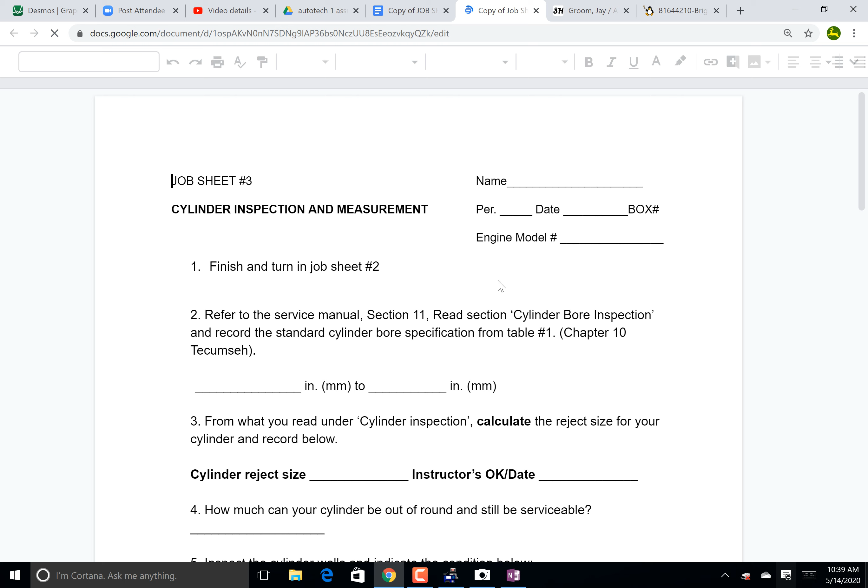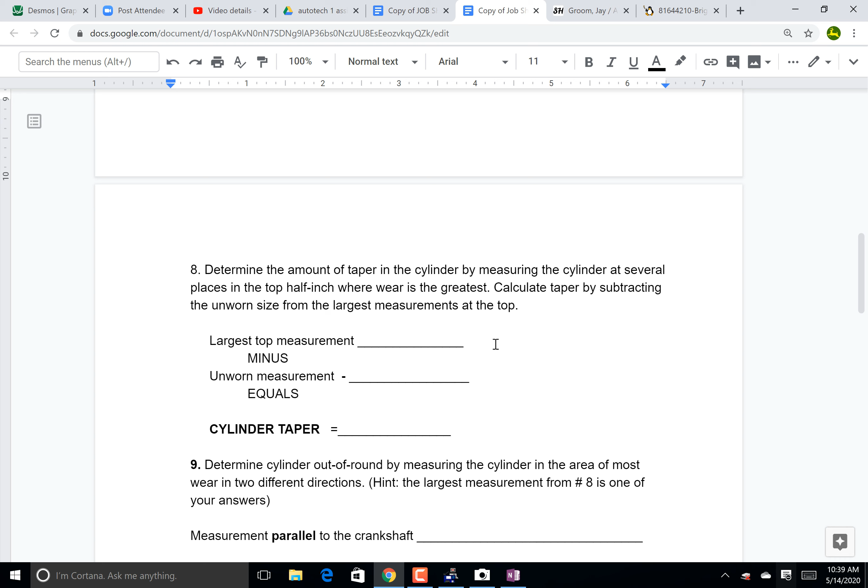Jeez. So we're gonna be looking at the cylinder. We're gonna see, what should it be measured at? How worn is it? That sort of thing. We're gonna talk about the top measurement and the largest one, and the unworn measurement. We're gonna talk about cylinder taper. Okay. And then we're gonna measure a bunch of other things here as we go along.

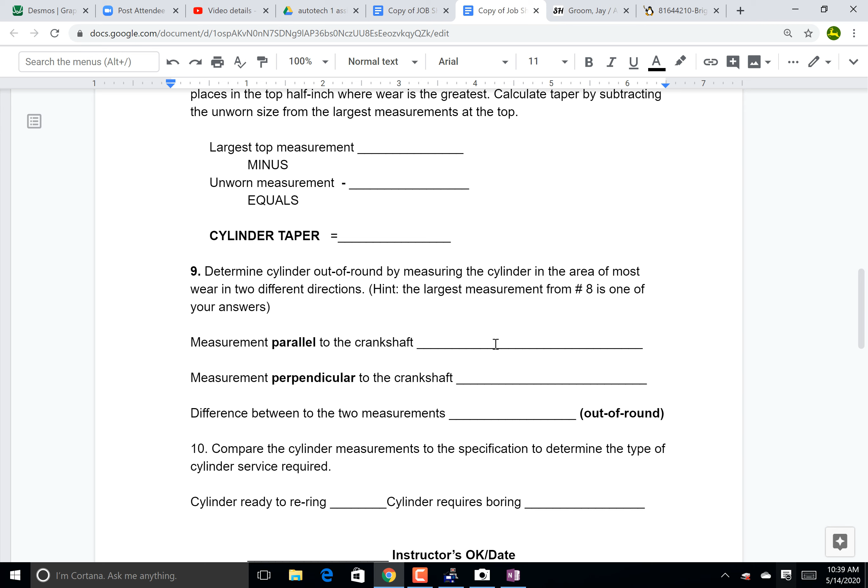Okay. Now, the general gist of it is this. As we come down through the line, we're going to look at the cylinder. We're going to look at the walls of it, see what it looks like. Is it still in good shape? How bad is it? Does it need to be honed out, or does it need to be bored out, or can I just put rings in it?

Newsflash, we're not doing anything. We're just putting rings in it. We're not even putting rings in it. We're putting the same rings back in. Again, we don't have enough money to completely rebuild an engine all the time, so we're not going to do that. But the things we are going to look at are as follows.

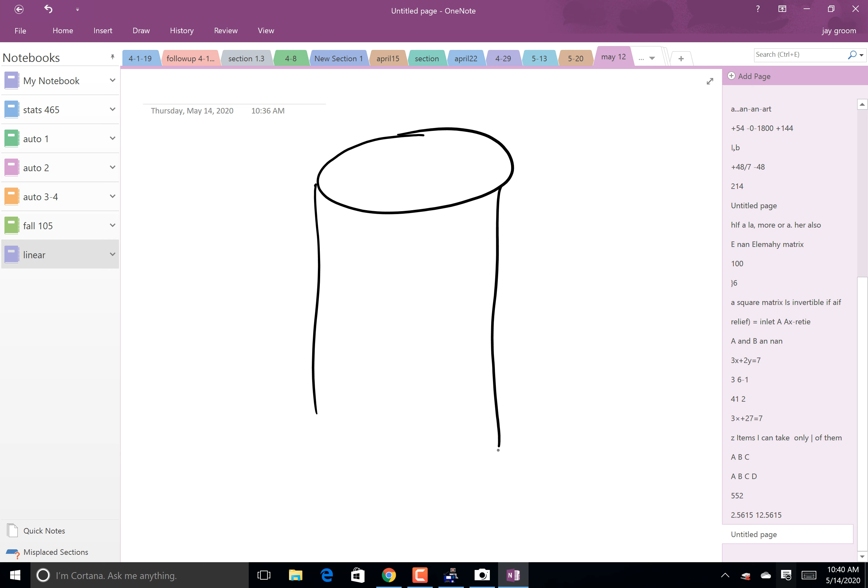So first thing we're going to do is inspect the cylinder, and I'll show you what that looks like in a few minutes. But we're going to be looking for, in a perfect new cylinder, what's called cross-hatching. So when they bore this engine out, they move the boring tool up and down fast enough that the little scratches it makes are not right next to each other.

Kind of microscopic scratches. They're small. You can see them, obviously. You can't really feel them. And then they go the other way. And the idea is that it's creating these little wall spots that will allow oil to get in and basically be embedded in the wall, and that will help to improve the sealing with the rings and the piston walls. That's what's called cross-hatching.

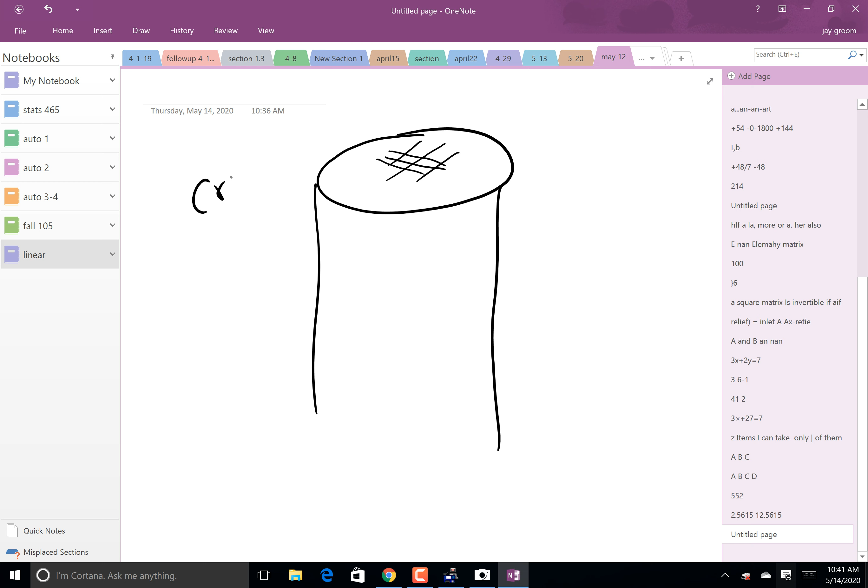Cross-hatching. Now, this cylinder we're going to look at in a second is pretty worn, to the point where you can't really see any cross-hatching anymore. You're also going to look for wear lines that are vertical; there will always be some after it's been run for a while. Those are not cross-hatchings. The vertical lines are not cross-hatchings. That's less than optimal, friends.

Think about this. If you put some oil here, it would run straight down, and oil could get past the rings and get up and get burned. Now, that said, in pretty much every engine that's been running for any length of time, there's always going to be a little up and down striations. What we're going to do is run our fingernails across them, crunch, crunch, crunch. If your fingernail catches on those, that is a problem.

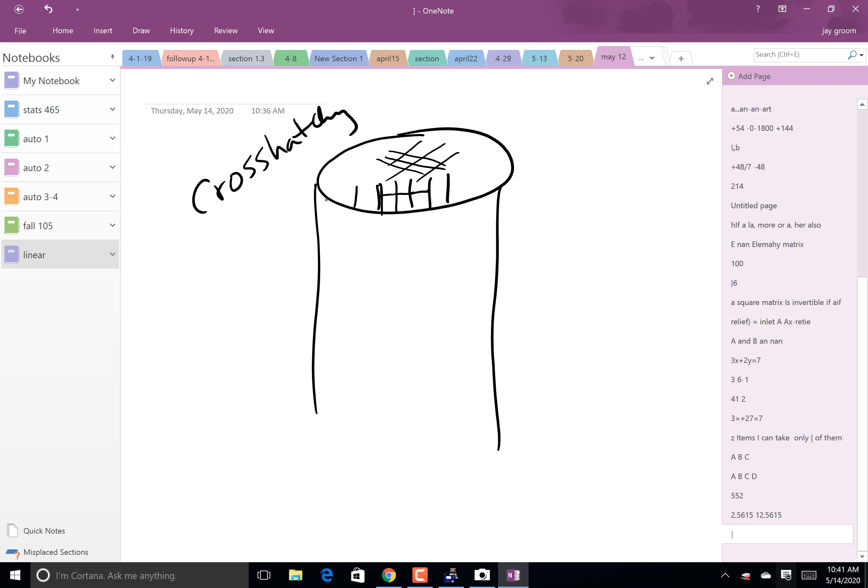If you can see them with your eyes, but your fingernail can't tell there's a scratch there, it's not a problem. If there was, we'd call that scoring, or scratching. So scoring is the idea that there's a little bit of these lines, but it's not that bad. Scratching is when you can actually feel them. Light scoring, some people will say, maybe you can just kind of feel it. But the point is, if you can feel it with your fingernail, it's a problem. If you can't, it's not really that big a deal. So don't want to see that ugly sucker.

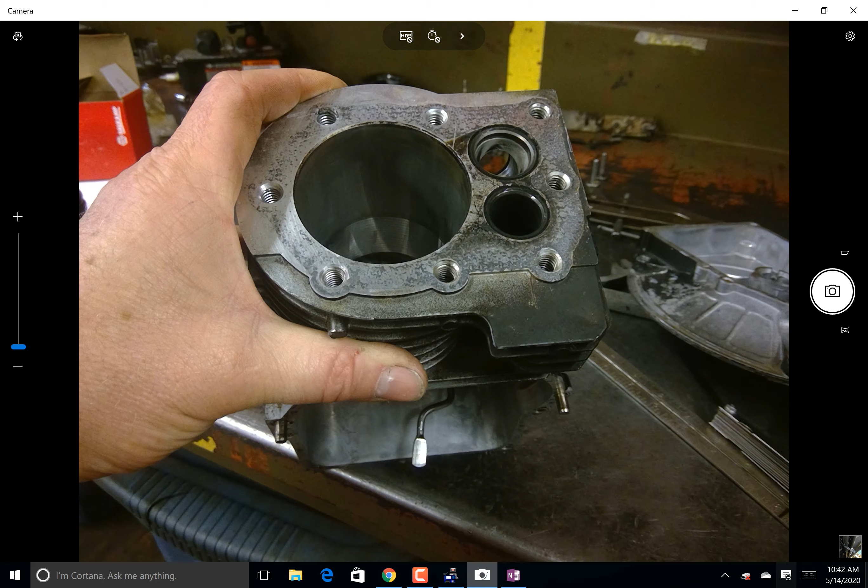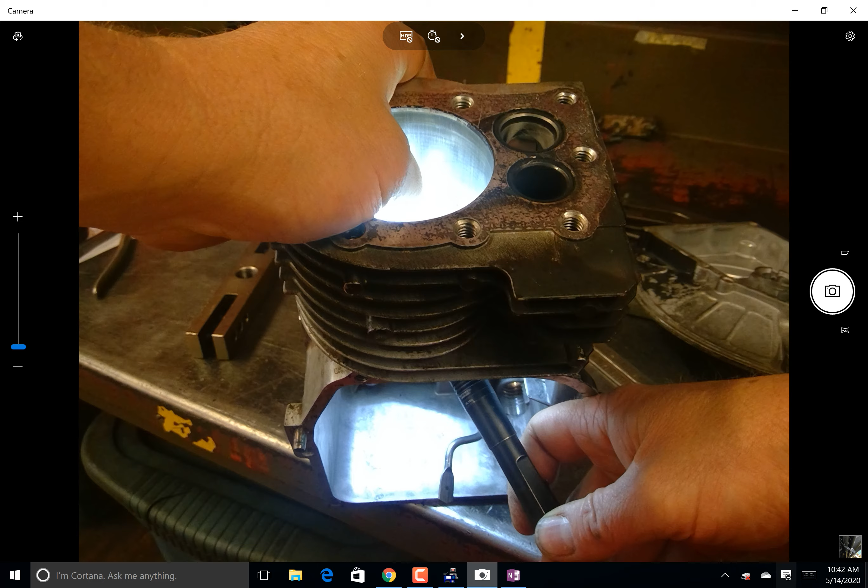In here, if you look into there, let me get some light on the subject for you. So if you look, maybe you can see some vertical lines, yes? Those vertical lines are the wear patterns in there. Maybe from underneath. Is that better? Yes. But what you'll notice is I take my fingernail and run across it, and I can't feel them at all. I can see them, but I can't feel them. So this is not bad.

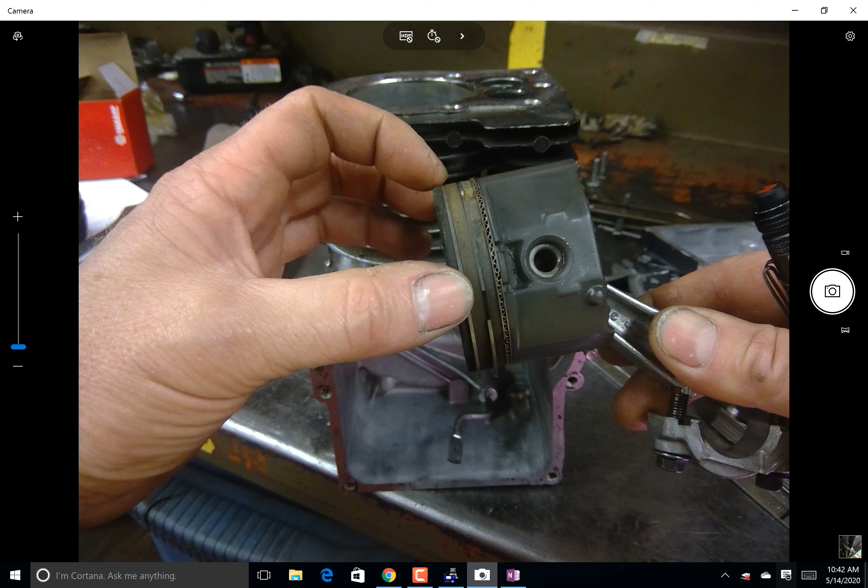Also, toward the very top, you'll notice the top ring on the piston does not go to the top. So oftentimes what's called a carbon ring will form right around the top edge of the cylinder here, and over time you will wear down below that top of the piston, because the rings will be rubbing on the cylinder for years and years, but not at the top of it.

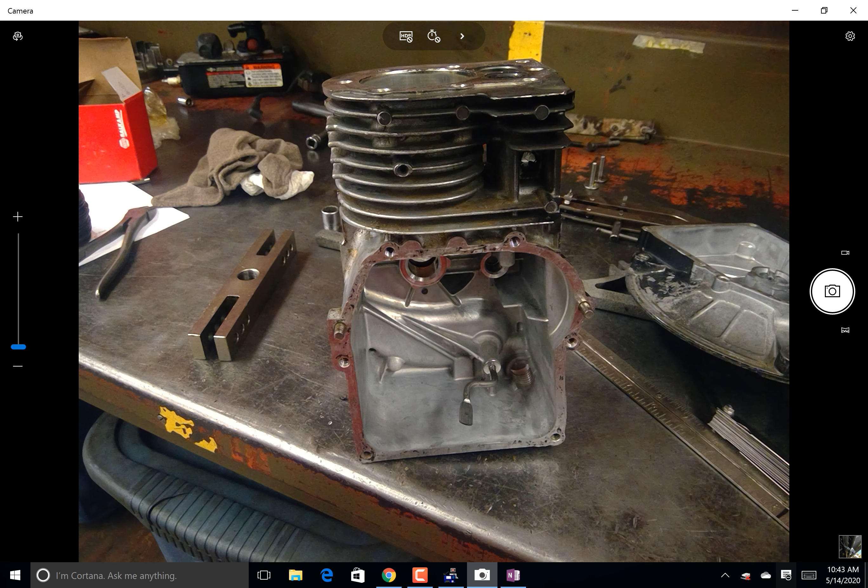So sometimes what you'll see, for a really worn engine, there'll actually be a ridge at the top, which is where the cylinder should have been, but it's been worn below that to the point where it's very damaged, obviously, at this point. And this one is not like that. This one is smooth as a baby's buttocks, and not dirty either, really.

Nice. I don't feel anything with my fingernail. It's nice and smooth. I also don't see, however, really any cross-hatchings in there anymore. I'll try to take a picture of another engine later today and clip that into this piece right in here somewhere so you can see what cross-hatchings look like. Well, maybe I'll just cut a piece from the interwebs and put that in there.

Now, what we're going to be doing today is measuring this. As you know, the diameter is the bore. In the perfect world, this is perfectly circular, and so whether you measure this way, this way, or this way, it doesn't make any difference. However, over time, remember the crankshaft runs this way, so this is perpendicular to the crankshaft. When this piston is coming up and the connecting rod is bent over like this, when it's being forced this direction, it's going to be kind of digging into the cylinder wall.

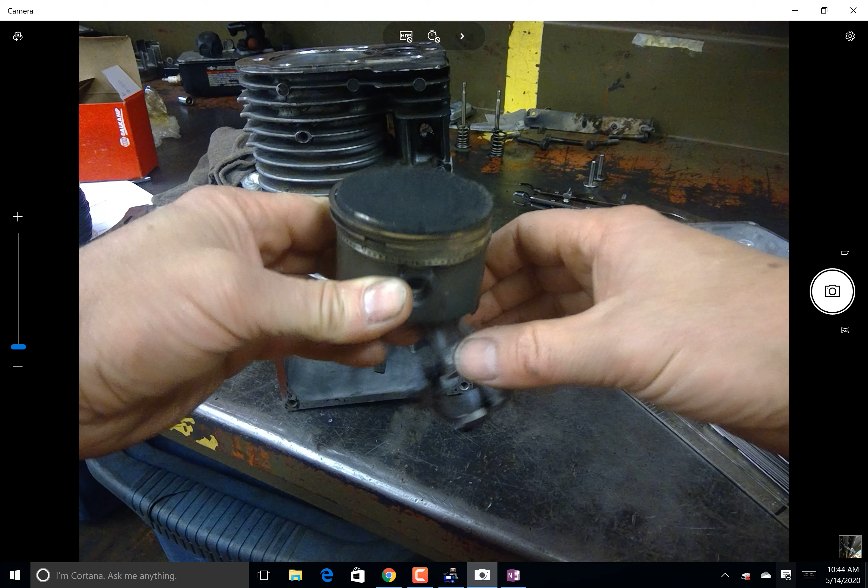That's grossly exaggerated, of course. And then as it comes up toward the top, it's going straight up and down. So on the top, you're going to get full wear all the way 360 for the most part. At the bottom, you're going to be getting a lot of digging this way. And what ends up happening is your cylinder becomes out of round, or if you will, a little egg-shaped. Not like this, just a little bit. And so measuring this way is going to be a little bit bigger than measuring this way. Perpendicular will be a little bit bigger than measuring parallel. But you will see that at the bottom and in the middle more so than at the top.

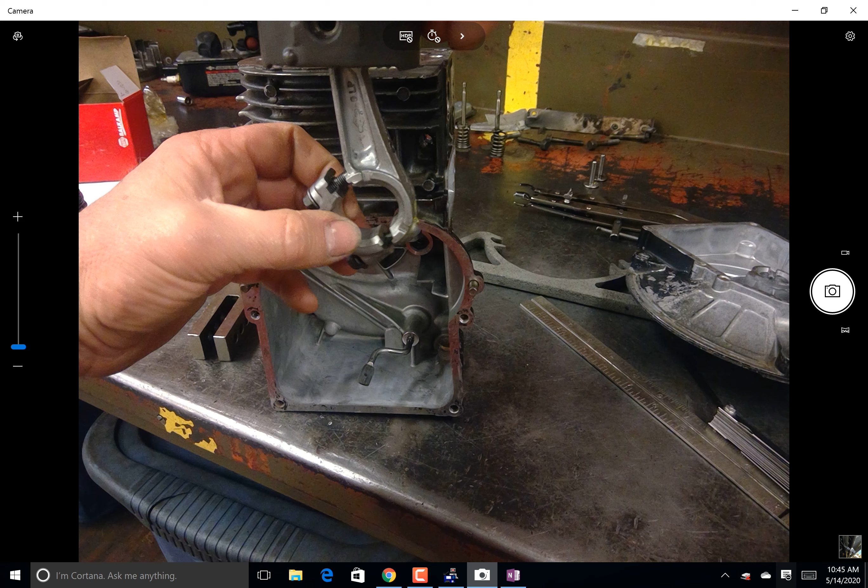At the top, again, when the piston's toward the top of the stroke, and obviously it goes down further than that, the idea is when it's up that high, the connecting rod is basically straight up and down. But toward the bottom, when it's really kicked over, you're digging in, and it'll create an out of round scenario for you.

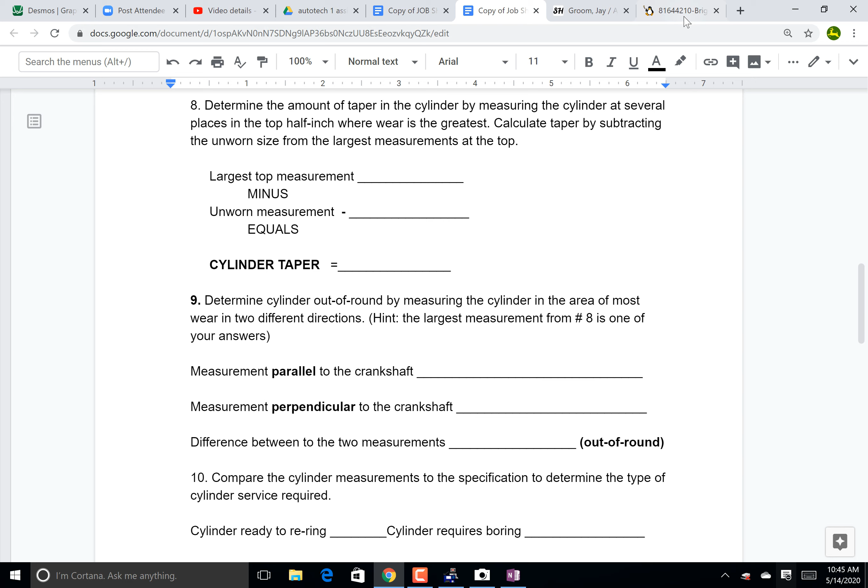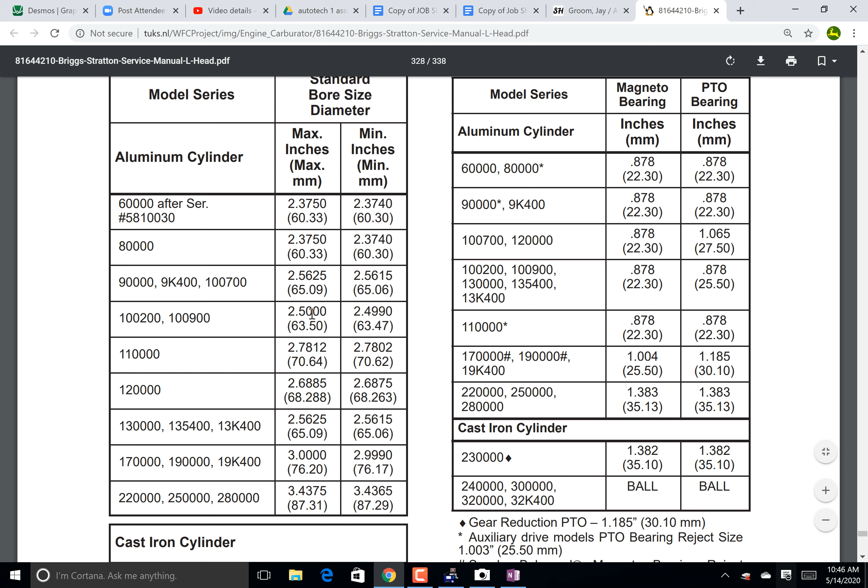Now, what we're going to do is a couple things. We're going to figure out what this engine is supposed to be. If you recall, this is a 10T engine. This manual does not actually cover the 10, well, it kind of does and it kind of doesn't. So it turns out that it's going to be this 10 series engine here. And I know this based on when I went and measured the diameter. If it was these ones, it'd be 2.5 inches in bore, roughly. Notice that that's plus or minus a thousandth of an inch. So that's the max it could be from the factory, and the minimum is this one right here. So it'll be within 1/1000th of an inch.

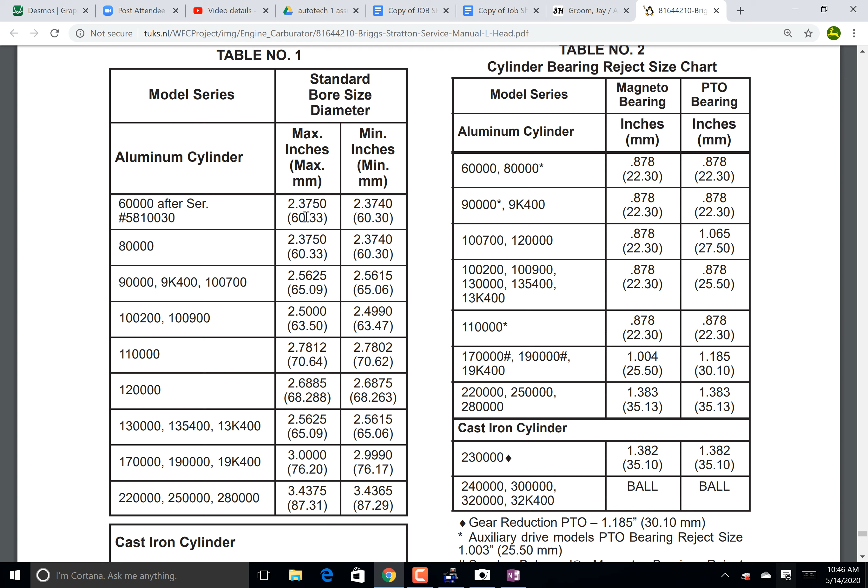Now, I went and measured it. Turns out we're measuring right in at 2.561-ish. So as you can see, that's obviously this one right here. It's the only one, I guess, besides this 13 series, which it's not. So it's that one right there that we're going to use for this. Now, what am I looking for? Well, it will tell me up here.

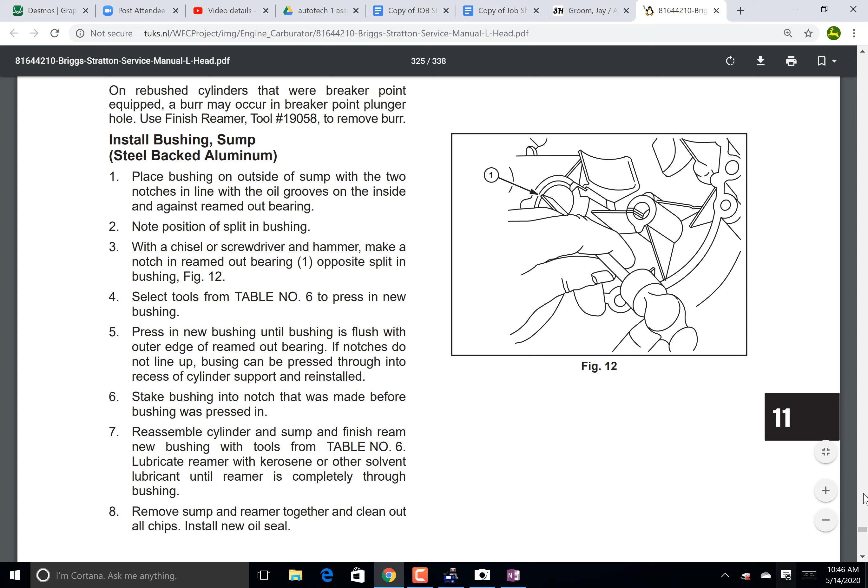Come on, Shimona. Well, there you go, friends. Look at that. Oh, fart.

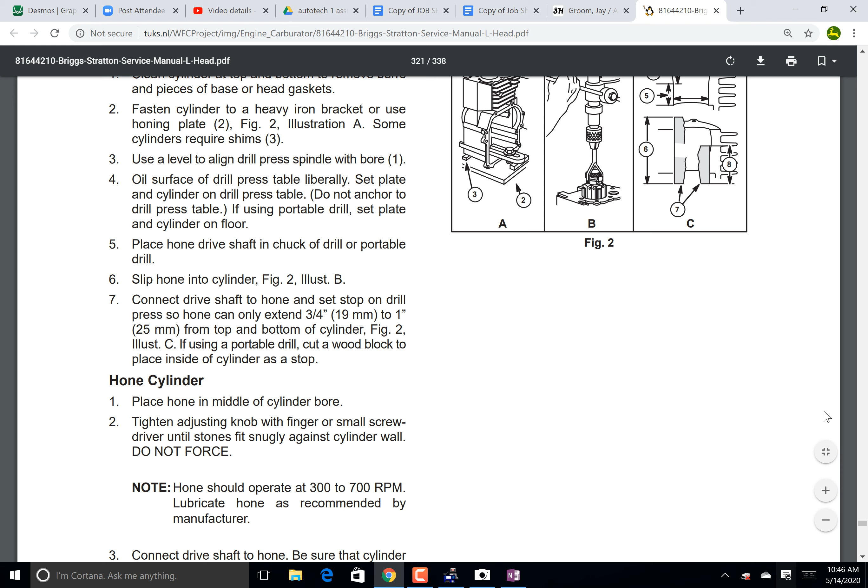That's what cross-hatching is kind of supposed to look like. You see that? But up here, a little bit more. Come on, Betsy. There we go.

So again, we're going to use the telescoping hole gauges, and we're going to measure at the top of the cylinder, perpendicular to the crank and parallel to the crank. We're going to do it in the middle, and we're going to do it at the bottom of the cylinder. This one should have the most wear, the second most wear, and the least amount of wear at the top. When we're done, check if the bore is more than 3/1000ths oversized. In other words, if you've been running this engine for a long time and it's worn and it's more than 3/1000ths over the initial bore, it's too big, and that would be a problem. The rings wouldn't seal anymore.

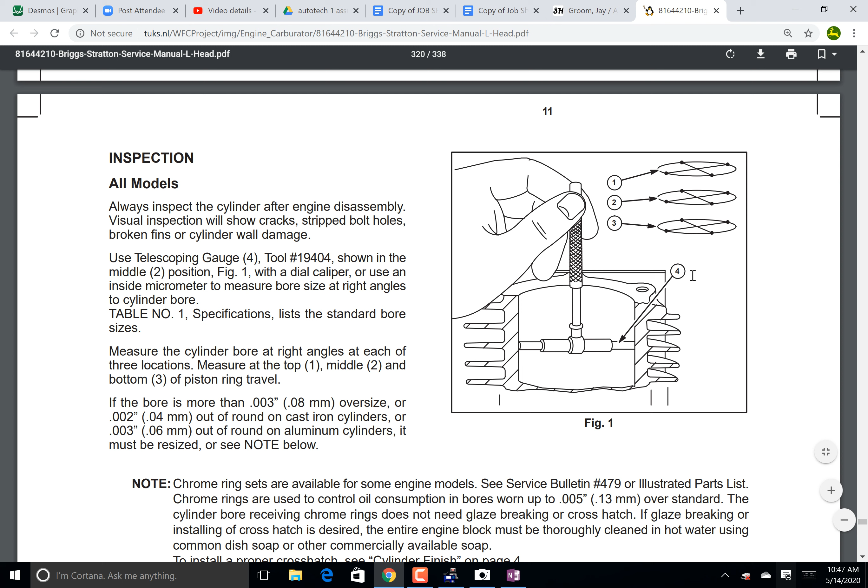Or it says if you're more than 3/1000ths out of round, that is when you measure, and again, it'll be this bottom one. And when you measure perpendicular to the crank, if it's more than 3/1000ths that way bigger than when you measure parallel, that's an out of round condition. It's egg-shaped, and that's no bueno, senor. No bueno. So I'm going to show you the first measurement here. Then I will probably just stop and do them off camera.

It's kind of a giant pain in the tushikins to do this while reaching over. I think I'm going to come around the table this time and do it, if you don't mind. Last time I tried to do it over the top and I kept messing it up, and I finally just started the video over. Screw that. Okay? Now, recall it is imperative that we are perpendicular. Tighten that baby down. Okay, so this measurement here is perpendicular to the crankshaft.

Sometimes I swear it'd be nice if I had 3 arms. I could find a use for 3 arms most days, I think. What would be nice is to have a clone of myself. Maybe 2 clones. One of me will go fishing, one of me will work. But see, the problem is if I had 2 clones, I would end up being the one that did all the work. Even my clones would be the ones that were out screwing around. That would piss me off.

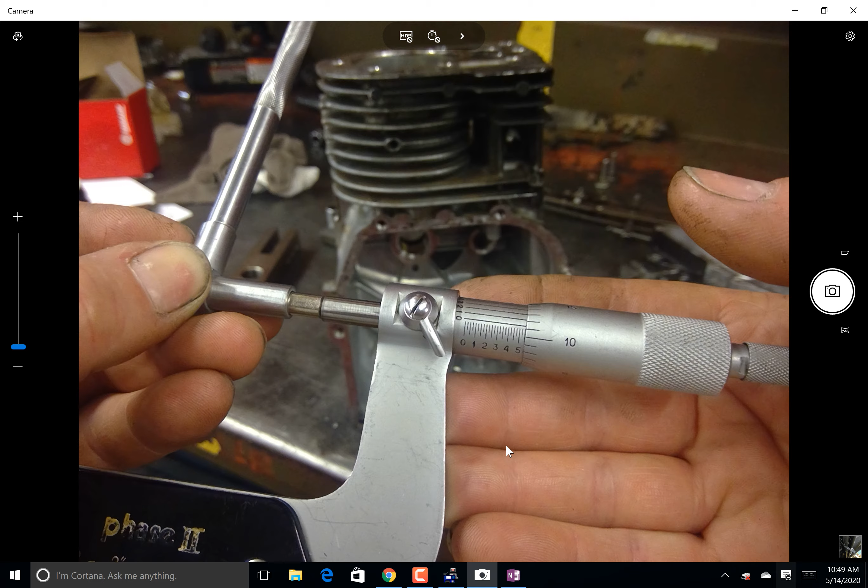All right, so here we go. So 2.56, 2-ish. I'll try to hold this so you can see it. Oh, fart. I think I mushed it down there. Anyway, you can see it's 2.5, and then there's 11. So that's 2.55 plus 11. It's 2.561 and a little bit. Are you with me? Okay, so that's pretty good. That's my initial measurement at the top.

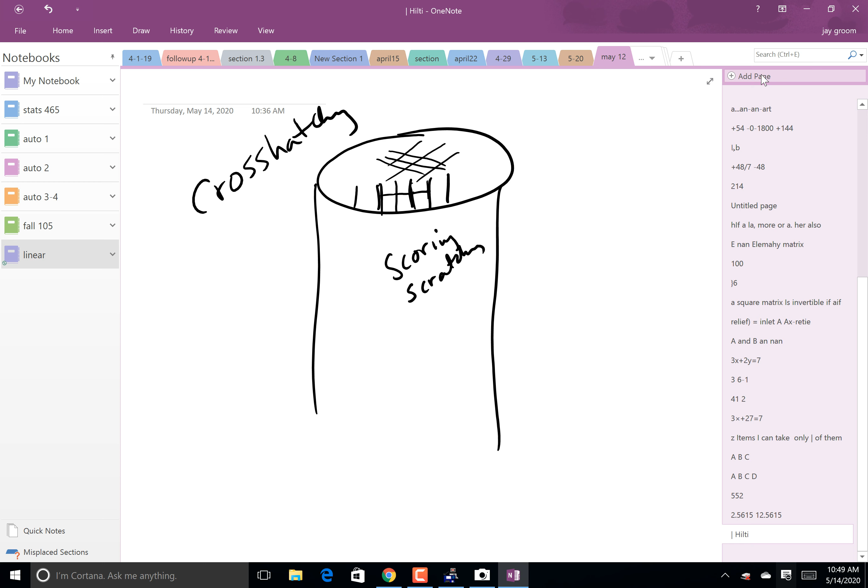I'll record the rest of them off camera, and then I'll talk to you about what they are, okay? I don't want to spend your whole day watching Mr. Groom trying to read a micrometer. It's kind of boring. So, top. And that was perpendicular. 2.561. Now, technically, probably you could go down to the 4th decimal, but I'm not going to be that excited about it, okay?

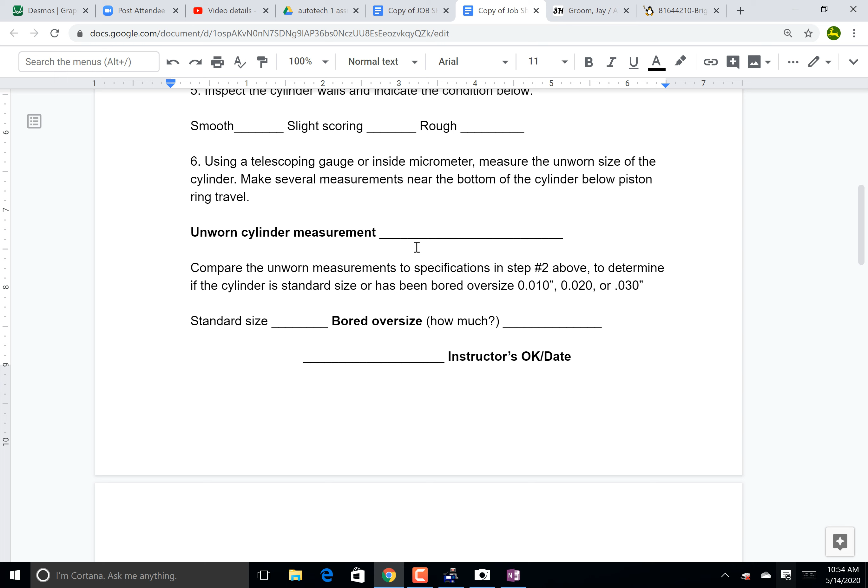Okay, so there are numbers, friends. As you can see, they're almost identical all the way down. So what does that mean to me? It means this engine's in really good shape. Am I shocked by that? Not really, on account of what I already said when we looked in there. The cylinder looked great. So we're going to start working our way through the sheet here. This is what the questions will be about. So, to the top here. Refer to the service manual, blah, blah, blah.

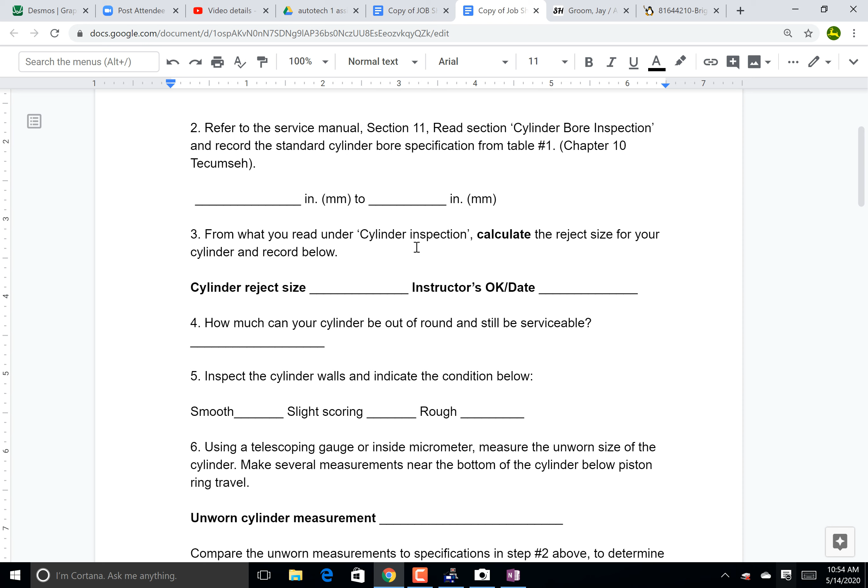Record the standard cylinder bore from table 1. That's 2.5615 to 2.5625. Those are mins and maxes, okay? That's from the chart. Now you look, you're like, Mr. Groom, this one is a skosh smaller than that. I actually went back and remeasured it. It came out basically right at it, okay? If you were a couple of 10,000ths off, not a huge deal. That's the answer to question number 2.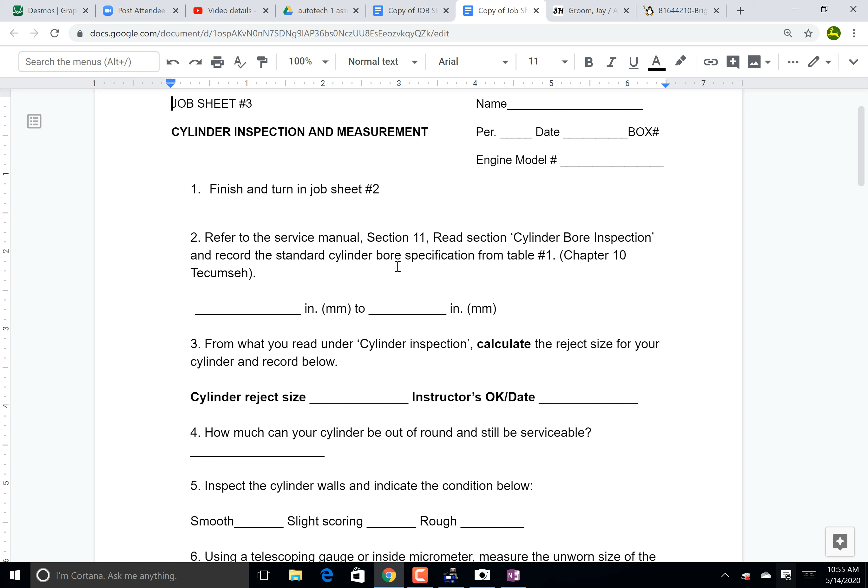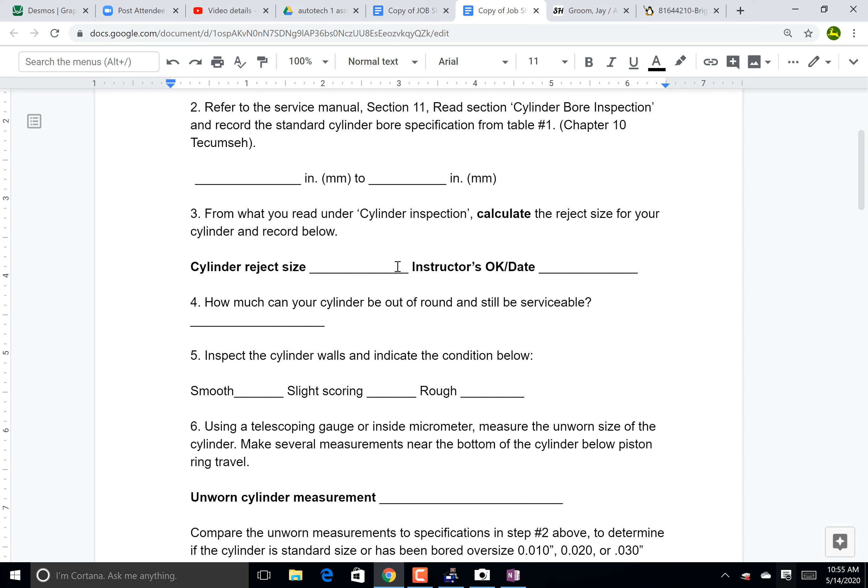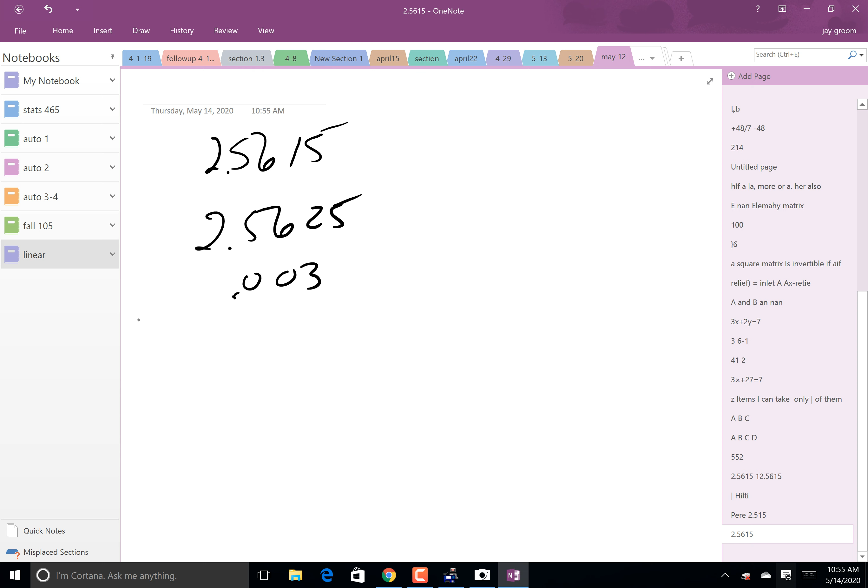From what you read under cylinder, calculate the reject size. In other words, when would it be too big? Well, remember, from the factory, it could have come a maximum of this big. If we were 3/1000ths bigger than that, where would that put us at? 2.5655. Anything bigger than that, no bueno. Bigger than this is our reject size.

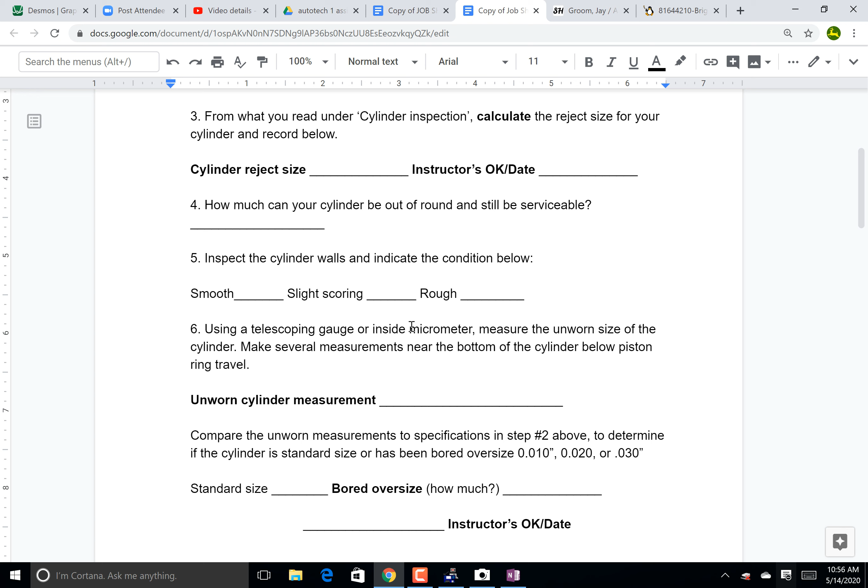Okay, where are we at? How much can you still be out of round and serviceable? Anything less than or equal to 3/1000ths of an inch. Okay. We are smooth as a baby's buttocks. Measure the unworn size of the cylinder. That's toward the bottom, below where the piston travels.

Now, for that, let's see this, friends. I will actually get you back on camera. Can't remember if this is the second time I filmed this or the first time. But right toward the bottom, you see it's nice and shiny right there. The piston doesn't come down that far. The rings don't come that far anyway. So I'm going to measure all the way at the bottom. In theory, whatever they bored it with at the factory, it should have been perfectly circular. Oh, fart. Try it again. And so the unworn portion at the bottom will tell us what it came from the factory with.

Oh, you hippie, you're not staying. Well, I hate you too. Piece of crap. I don't really hate it, Mr. Groom. Mr. Groom, you shouldn't say things like that, I feel like. I was reading like on face pages. Oh, nice job, dummy. I was talking to myself. I'll interrupt myself with myself. My story from earlier. I would like to clone myself. I think that'd be fun. Not because I really like myself that much, but I usually get a lot of work done. So it would be nice to have someone who worked as hard as I do to get some work done with me.

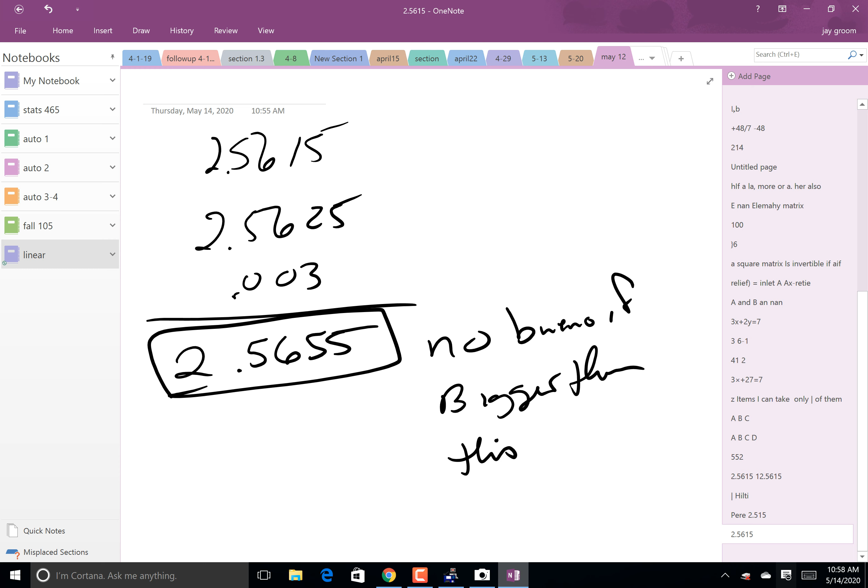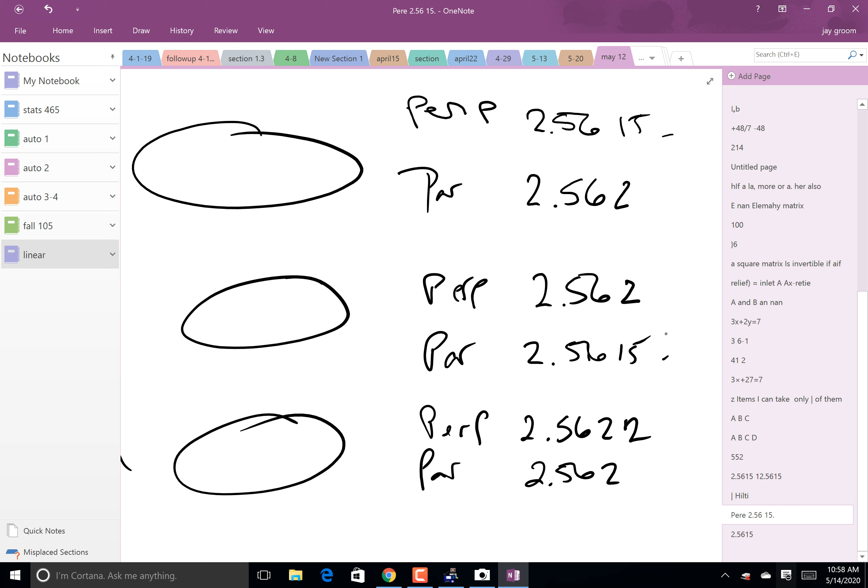2.561. 2.5617 it looks like. So our unworn, 2.5617 is what it looks like. Now you come over here, Mr. Groom. How is this one smaller? And how is this one smaller? It's off by 2/10,000, and Mr. Groom probably made a little boo-boo reading it. Okay, so not a huge deal. So that's our unworn measurement. Cool.

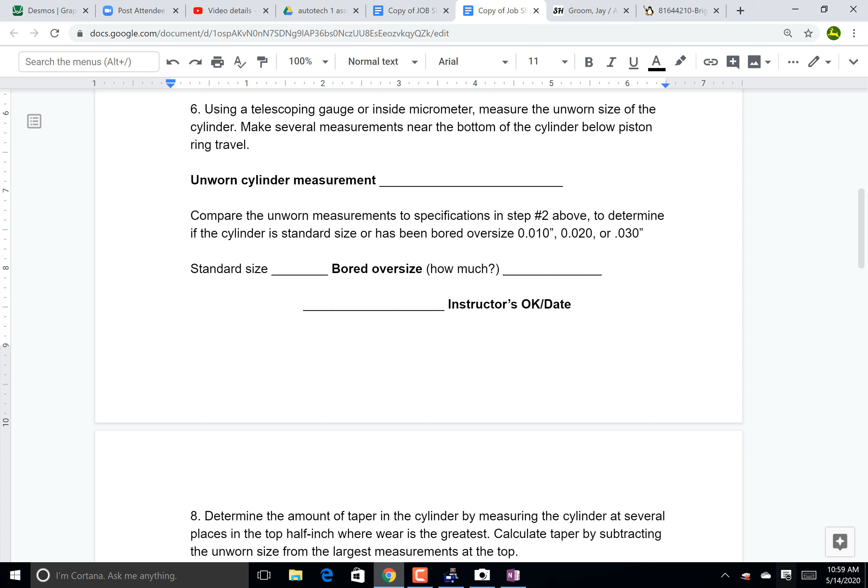Is it a standard size or is it overbore? Well, how would I know, Mr. Groom? Well, standard size is between 2.5615 and 2.5625. Are we between there? Yep. Then we are a standard size. Also, it's a good bet on an engine that was made whenever this one was made, well into the 21st century, if you will. People don't really bore these things anymore. If this thing had been made in the 60s, it's a good bet that it could have been bored at some point. Someone might have done some work to it. But as new as this engine is, no one has worked on these things like that for a long time.

Now here we go. What we are going to do is find what is called the amount of cylinder taper by measuring the cylinder at several places in the top ½ inch where the wear is greatest. So in the top cylinder. Okay, so we're going to subtract those. When we do this, we're finding a cylinder taper. I don't really like the way that's worded, but what we're going to do is find our biggest differences, and so our biggest one is, I guess, this guy here, minus our unworn size. What did I say? 7? 7. So your taper is 5/10,000, or less than a half a thousandth, which means we're golden in terms of our shape here. So just be aware of that.

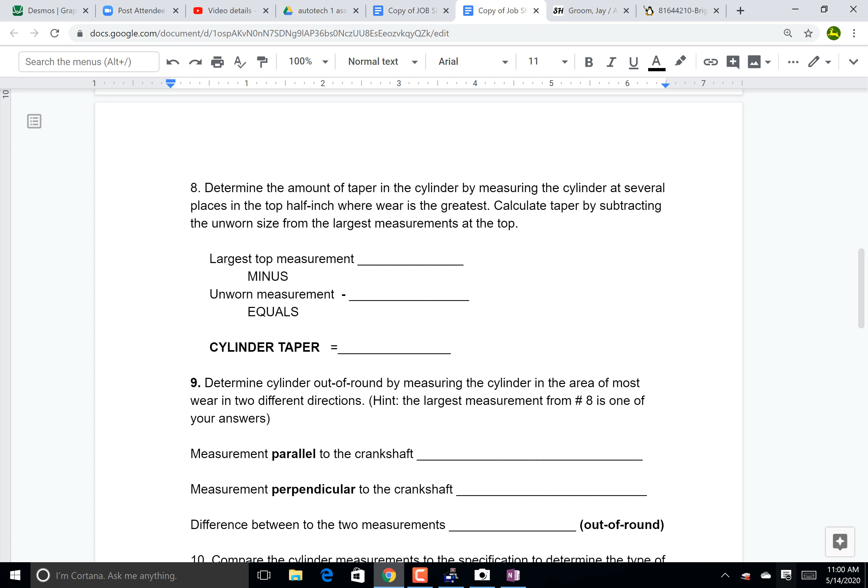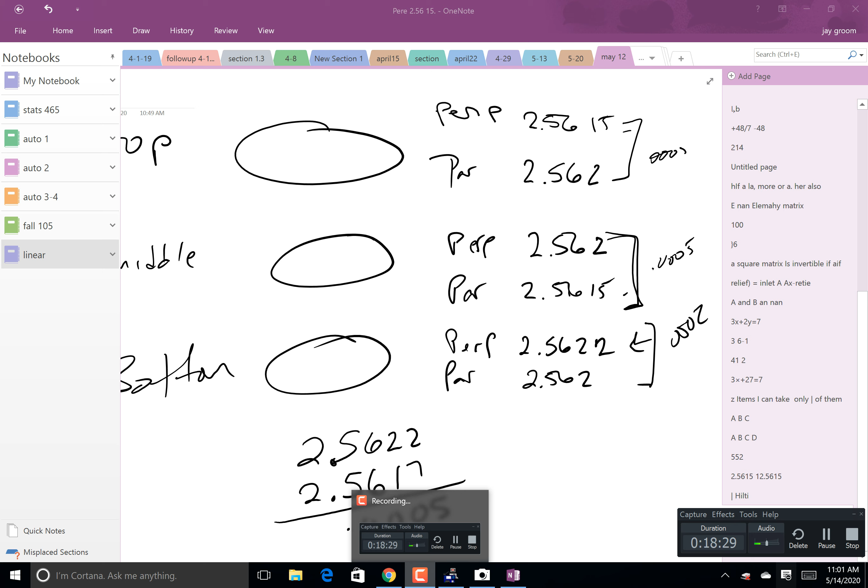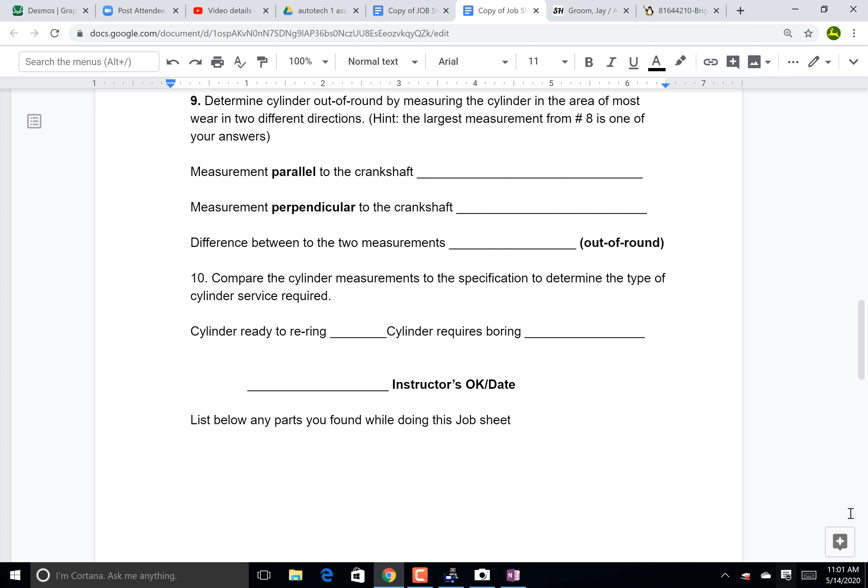So we're going to determine our out of round by measuring. The large measurement is one of your answers there. So obviously, what we want to do is measure the biggest differences here that you see. So our biggest differences are: this is 7/10,000s, rather, no, it's not. It's 5/10,000s. And this one here is also 5/10,000s. And this one here is 2/10,000s. So when you look at this worksheet, the difference between them is out of round. Well, we're at 2/10,000s. How does that make us look? It makes us look really good, right? Because clearly,

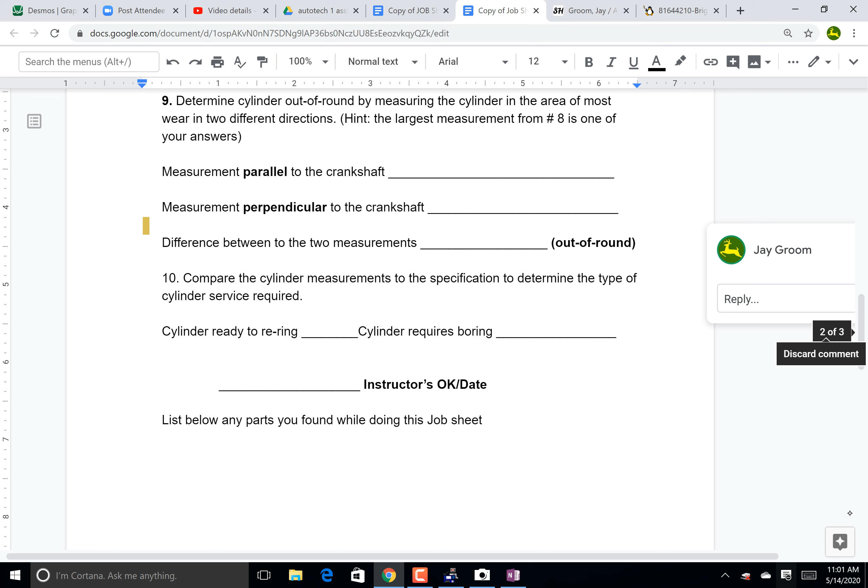What just happened? Oh, I can't write. Oh, cancel. Fiddle faddle on you, sir. Fiddle faddle, I say. So, anywho, there you go.

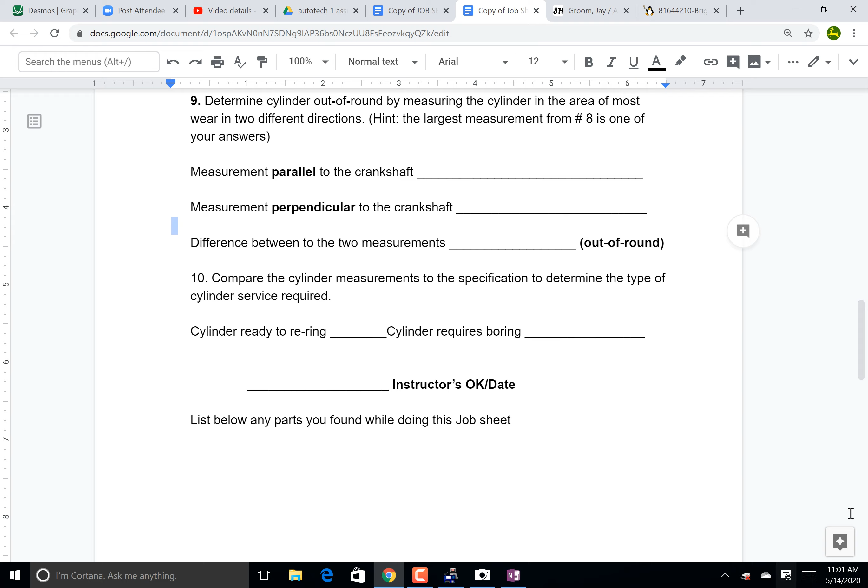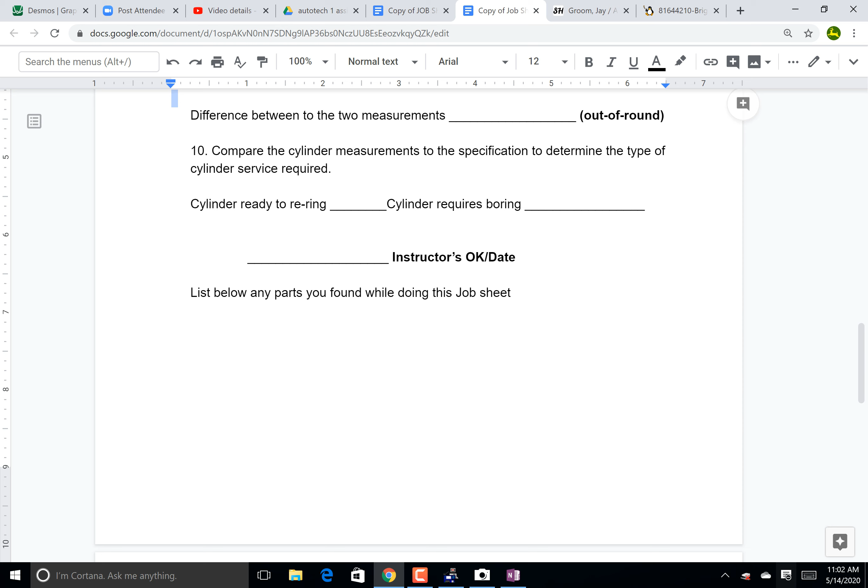So, 2/10,000s. So, the question is, is this thing ready to re-ring or does it require boring? Well, it would require boring if it was out of round beyond the maximum, or if it was worn beyond that. If we had too big a cylinder taper, or if it was out of round, those would be the reasons we'd have to bore it. It's not. So in theory, you pull a piston out, you're going to put new rings on it if you're really building a car. That is not what we're going to do with this rig. We're just going to put it back together and run it. So ready to re-ring is what we're looking for here.

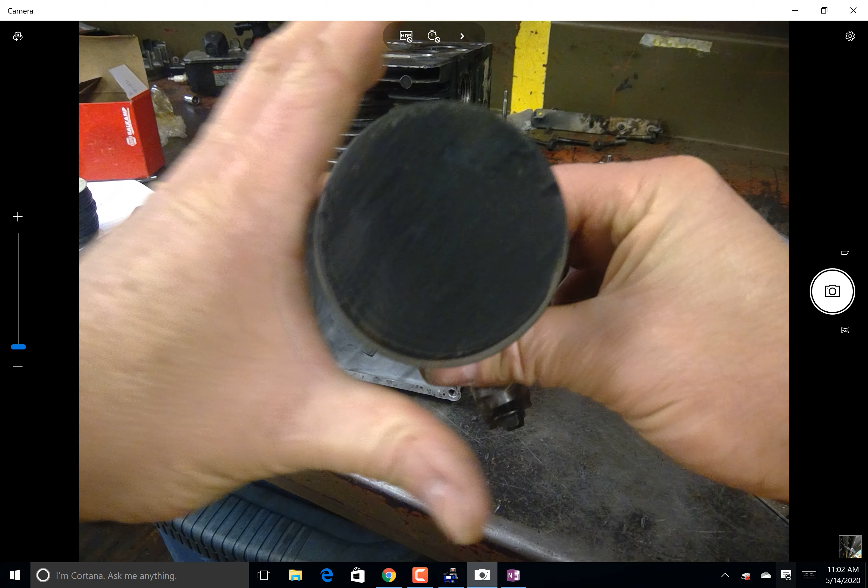Now, these are some questions I will probably have on this, but if you think about it, if your cylinder is out of round, well, last I looked, your piston is round, and your rings are round. So if the cylinder was egg-shaped, like that, it's a little over-exaggerated, what would happen to your rings? And if your rings have an issue, what else is going to happen? Think about that. And what happens with cylinder taper, same kind of process. Anything that's wrong with your cylinder is going to affect your rings. And if your rings are bothered, the same things are going to happen every single time. Go back and think about what we've looked at. What do the rings do? They help create something, and they also keep something where it belongs. So those are the things to be looking out for on this guy here. Very, very healthy engine.